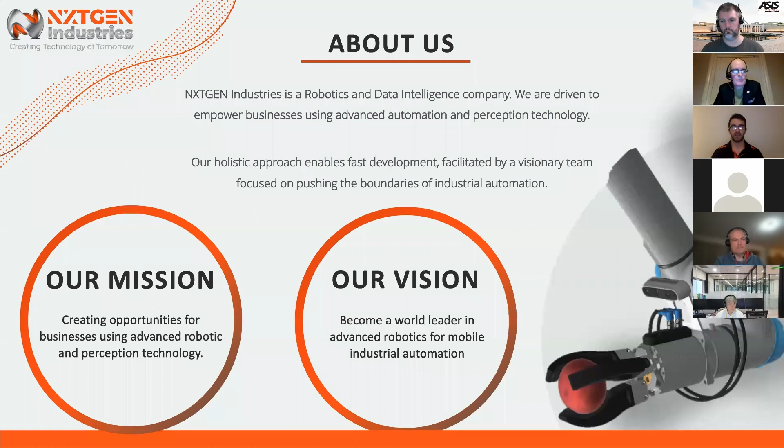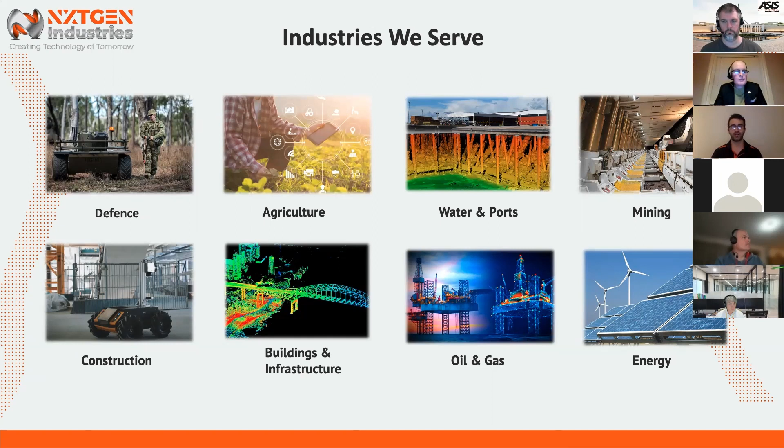As I mentioned earlier, we do work across many different industries. We like to consider ourselves as industry agnostic, and the reason why is in all of the industries we serve, we always find that the requirements industry is looking at for robotic tech is often very similar. They're looking for that mobile autonomy, the ability to provide eyes and ears without having to need people there, and delivering insights. So we do serve a lot of these industries, and I know I don't have the security industry up on this slide, but I also feel there are going to be some commonalities and problems we'll discuss later that are shared amongst some of these industries we've served in the past.

So when diving into the skill sets that we have in our business and what's required behind robotic development, we cater around mechanical, electrical, control systems, and software engineering. Now, all of these skills are required to deliver the variety of services.

Shane mentioned a couple earlier. We do offer industrial robotic design and build services, robotics as a service, and I'll talk about this a little bit later on. It's becoming really valuable where some businesses can't justify purchasing robots up front, so they implement them as a service. It becomes an operational expense rather than capital expense. So where we have robots available to perform tasks, we offer these services as well.

We also implement perception and vision systems, and this is where we use some of the technology that we integrate within robotics. But it's more aimed at providing insights and analytics, specifically around counting, classifying, object tracking, and things like this.

And then last but not least is consulting. This is where we work with businesses to identify the opportunities, maybe some of the challenges, and work out how we can adopt this type of technology within their business's day-to-day line of work.

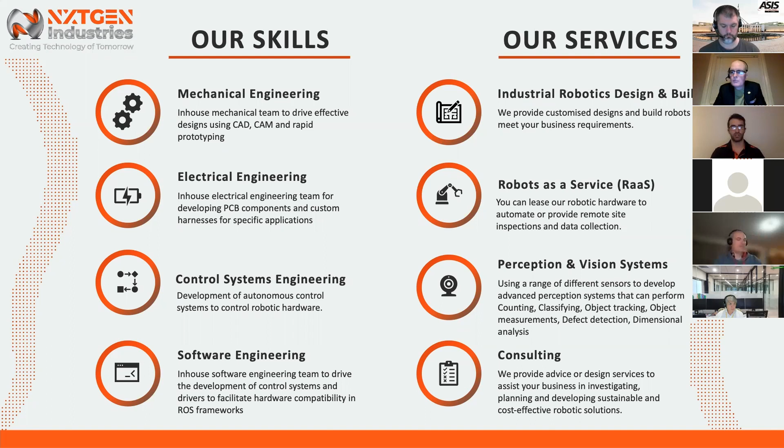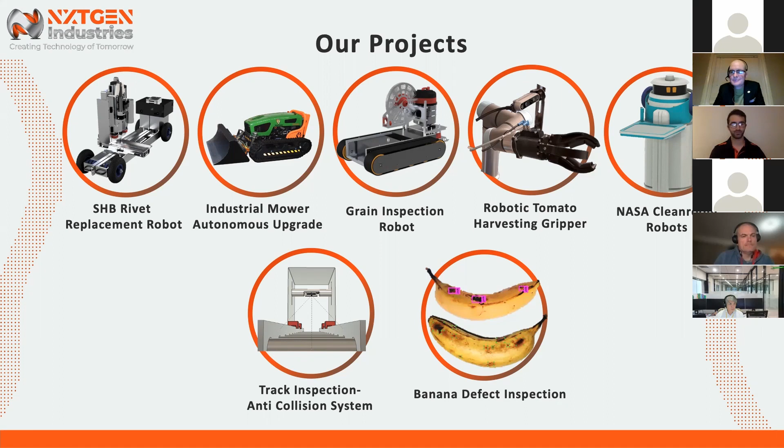Going into the first project, our Sydney Harbour Bridge robot. This was a necessary system to implement, as it eliminated the need for humans to perform their work within confined spaces.

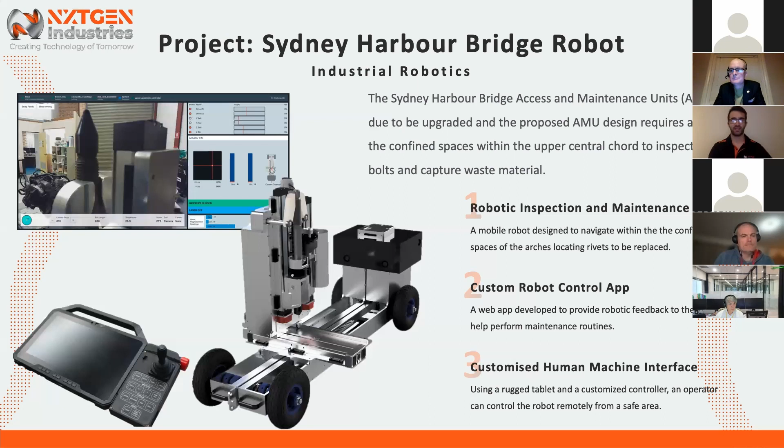What we delivered as part of this project was a robotic inspection and maintenance system, highlighted in the bottom right image. We developed a custom robotic control app, shown in the top image, and also developed and customized a human-machine interface, like a joystick controller, which attaches to a tablet. Altogether, that formulated a solution to replace the rivets in the Sydney Harbour Bridge. This is a video showing the robot in operation.

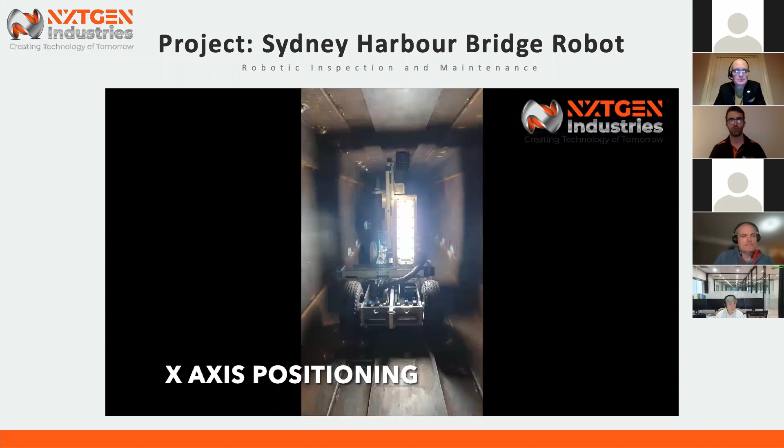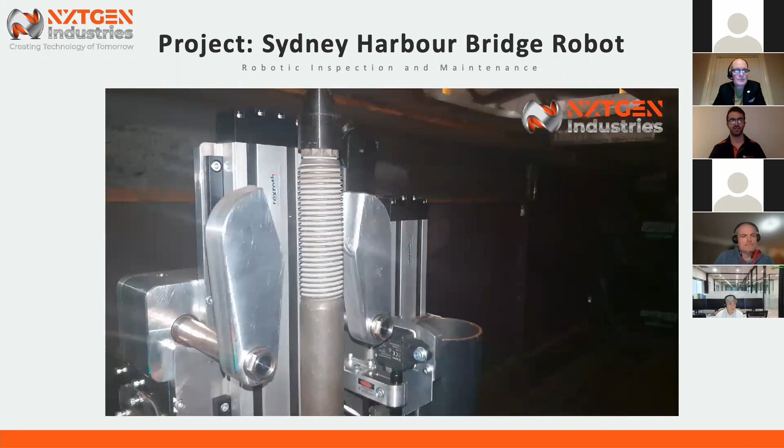What you're seeing along the top is the upper assembly, where all the advanced sensors are, such as the gripper, which clasps the new bolt that will be inserted. It also has a catchment, which you'll see in a few seconds. We've got a pan and tilt camera to provide visual feedback and positioning.

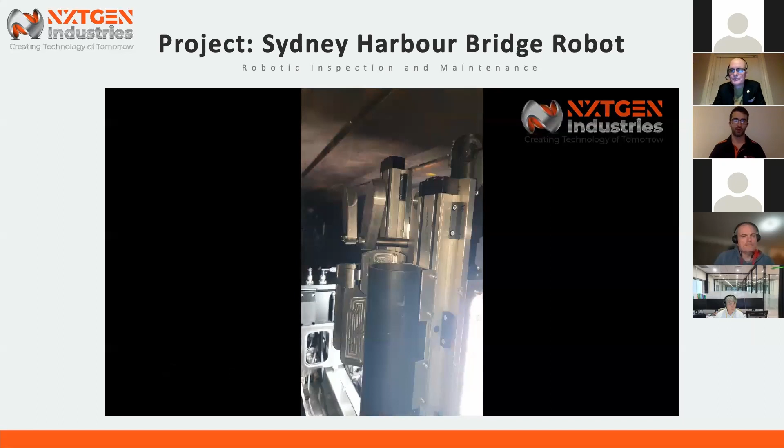We also have laser positioning, which helps the operator align the tools to the specific rivet they want to remove. We've also got the capability to drive forward and back along the confined space inside the bridge, fully illuminated with LEDs. This is what you're seeing with the tool change process, with that laser positioning, and then how we can insert a bolt where there's no bolt in that video.

Moving on into some of our solutions. I think you'll find this quite interesting, because this is where we start showing some of the autonomy in these robots. Our first solution is specifically tailored towards the robotics aspect of our business.

This is our industrial robotic mobile robot, and we're really proud of this robot because it is extremely modular by design. It comes with a control app, and it is fully autonomous.

We've designed it this way because we believe this robot can be tailored rapidly for various industries and applications. Being highly modular, you can modify it, implementing different sensors and different payloads, and also control it through the control app using different methodologies for mission planning.

With mission planning, there are three key types commonly used in various industrial robots. The first method is waypoint upload, where the user specifies coordinates for the robot to navigate to and then perform a task.

The second option is what we call teaching. You remote control the robot and teach it to perform a particular routine or navigate along a specific path. This is often one of the most desired methodologies for path planning, because you know exactly what you're going to get right from the beginning.

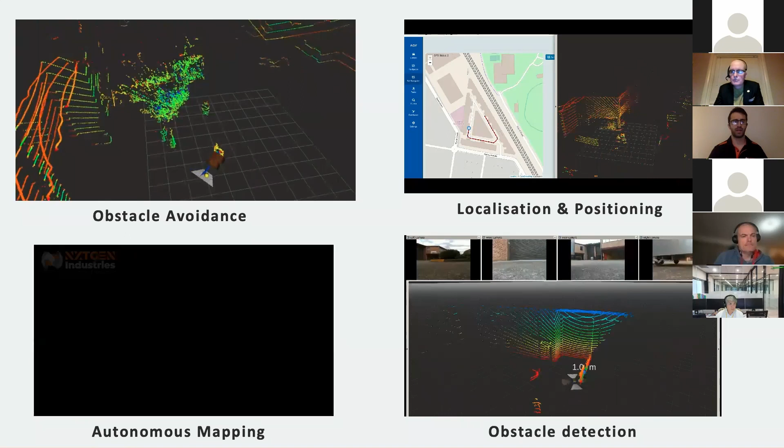Moving across to the right video, we're demonstrating the robot's ability to publish its location and position in an outdoor environment, and also publish its environment using the LiDAR sensor on the right side of that top video. What's really interesting about where robotics have moved to is we're able to use really high accuracy outdoor positioning using what we call RTK systems, giving us accuracies of up to about 3 centimeters outdoors. I'll talk about the bottom left video, which I'll replay.

This is what we talk about with autonomous mapping. Autonomous mapping is highly valuable in indoor environments. It's important to teach the robot its environment before progressing on to mission planning, because it needs to know its environment and also provide the user a way to key in inputs on certain areas where you want the robot to navigate to.

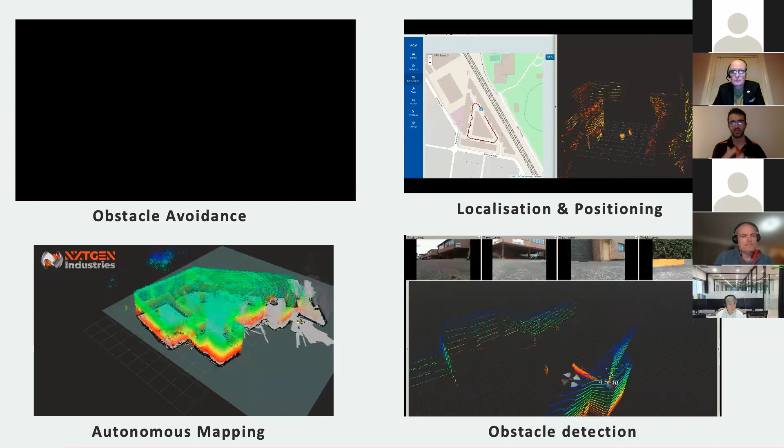As we move into the bottom right video, we're looking at how obstacles are detected, classified, and segmented. It's perceiving obstacles, clustering those objects and saying these are actually obstacles, and we want to work our way around that.

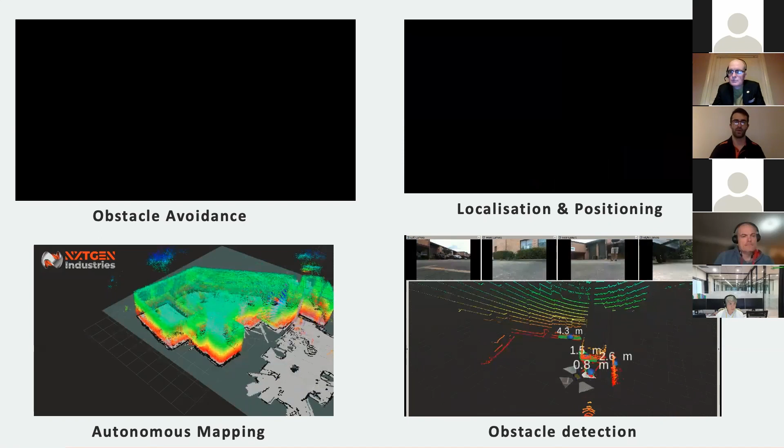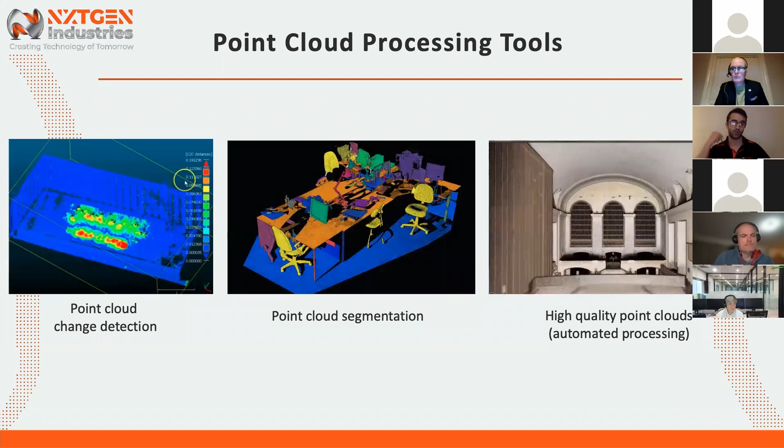The third video demonstrates the highest resolution we can achieve with point cloud data, where we can augment imagery, combining visual imagery from a camera and LiDAR data, overlaying those data sets together to get the output you see in that right video.

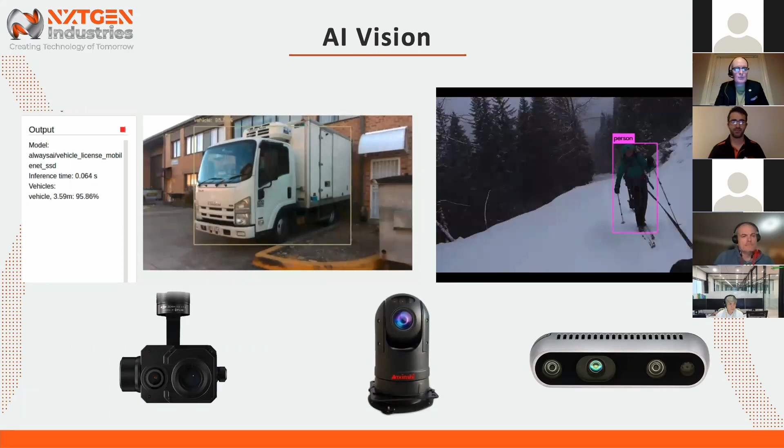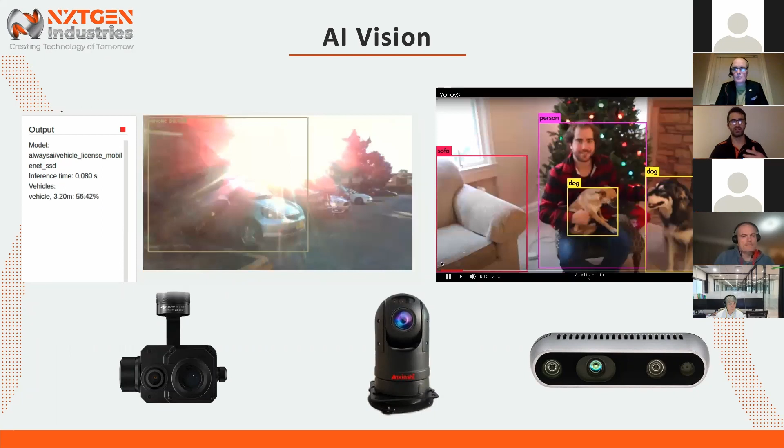As mentioned, what we brand as AI vision, also video analytics, these are some of the capabilities quite common in robotic applications. On the left-hand side, we're demonstrating the ability to detect vehicles and number plates in real time, but also using sensors to provide feedback on the distance of that vehicle to the camera, and this can be done in real time.

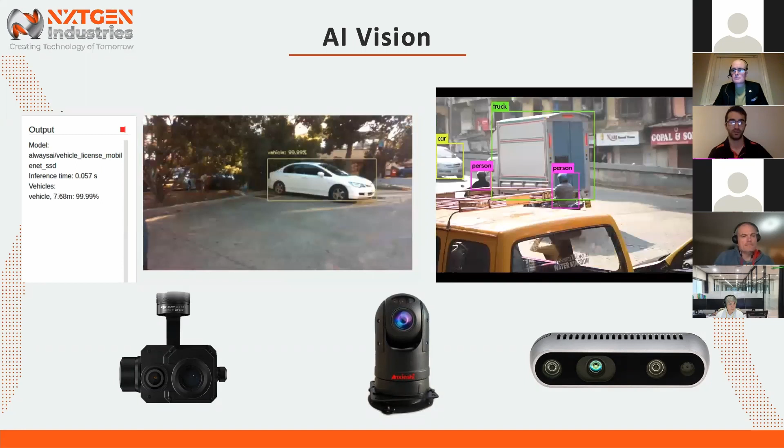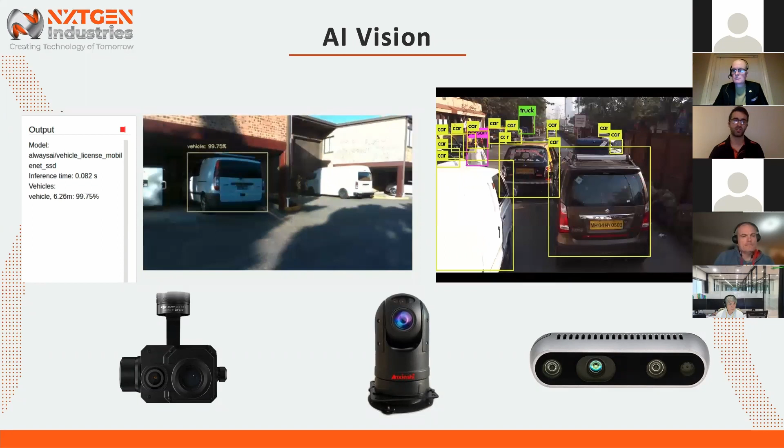There's a wide range of platforms and pre-trained data sets that we can make use of, as you're seeing on the right video. We're able to pick up on various types of objects like vehicles, cars, horses, birds, using existing pre-trained data models.

Something I should point out here as well is you're not really restricted by the hardware in this space, because you can always do this type of operation as a post-operation rather than in real time. So it can be done offline.

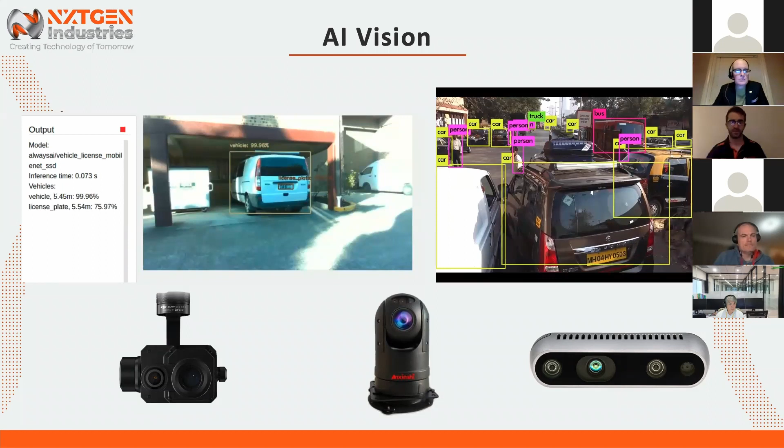Alright, let's dive into the security side of things. Now that I've shared a bit about and demonstrated the capabilities of robots and inspection systems, I'm going to dive into the security space and provide some of these insights.

You know that there are solutions out there, and I've looked into them and got some feedback. Nonetheless, some have got impressive features, but I'd like to see a little bit more out of them.

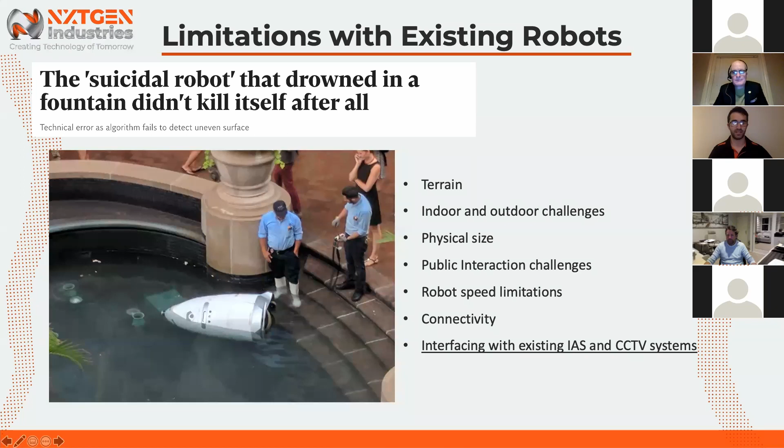So let's have a look at some of the potential applications where robots can provide value. A few of you may be familiar with the deter, detect, delay, and respond security layered methodology. I'm going to use our Knightscope robot again as a feature of this, because I think there's a lot of value that robots can deliver in these four key areas.

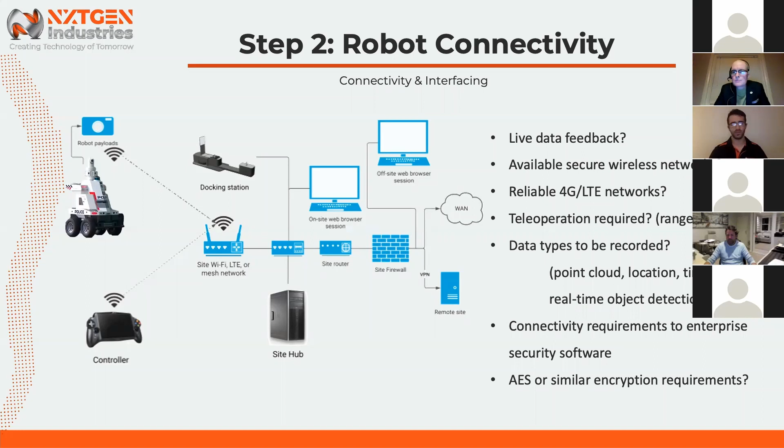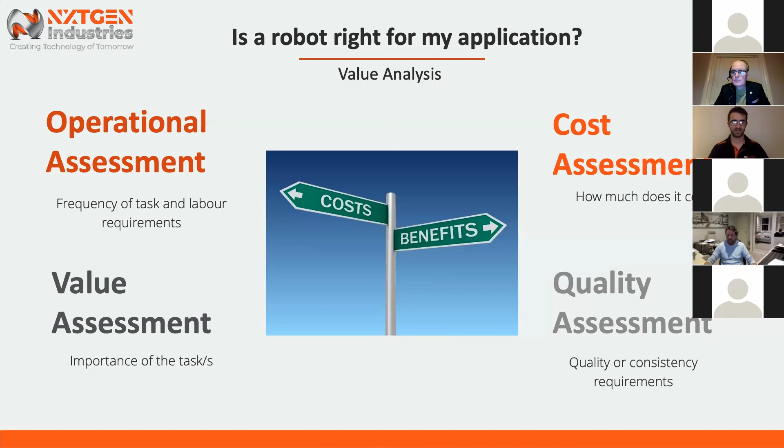So when we look at the outlook for security robots, my answer is pretty simple: it depends on 2 key factors. The first thing relies on industry uptake, and the second is obviously the technology to support the development of the solutions. I'm particularly interested because I think as the industry takes up the technology and robotics as a whole, we'll start to see a lot more specific applications coming out.

So we mentioned before around the 4 key areas: deter, detect, delay, and response. I think robots are going to be able to actually deliver specific value, and specifically around providing more in the delay area that I didn't mention.

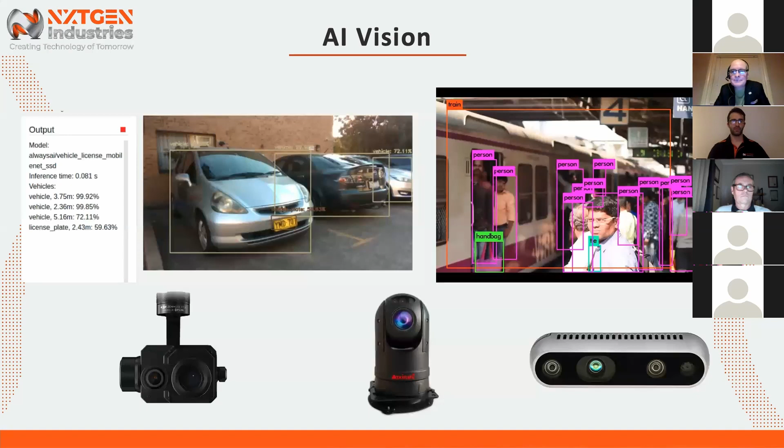If you want it to do a pre-trained route, absolutely, and that's particularly what they do in industry. Rather than the robot making up its own mind, at an industry level that middle option is often enough, because you want to make sure that you're going to get that right coverage. So on day zero, when we're doing that commissioning process, it's often someone remote controlling and seeing what type of visibility they get out of the drone as they move around. Once they're happy with the mission and the route, they save that, and then we say we just want to repeat this on an hourly, two hourly, maybe daily basis. So absolutely, you can set those parameters.

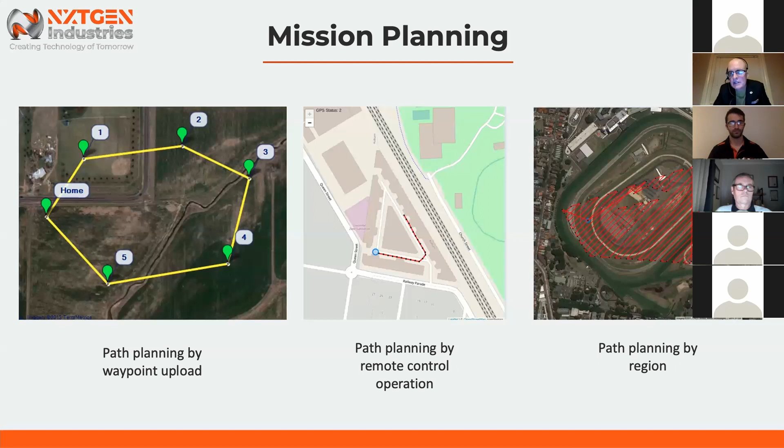Great. His second question was just an observation around how much of the example tasks look like functions that can be done by CCTV. What is the special functionality that robots bring to a fixed installation? I guess that's something we already touched on.

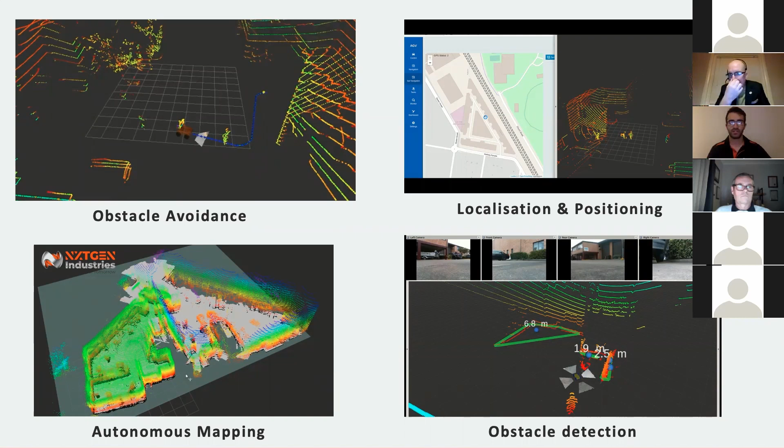Yeah, look, to be honest, to put it simply, the way the current robots are branded is they're mobile CCTV footage, CCTV platforms. Realistically, I'm just going to bring this slide up - this is often where we provide a lot of our insights, where you've got large properties, large areas, and it's just not justifiable to put lots of sensors out there.

A particular application, completely tangent and irrelevant to the security industry, is on farms. A lot of farms are looking at IoT technology where they put lots of sensors, but when you talk about managing the assets, managing the sensors, managing the data, and also the cost to maintain those assets, it gets to a point where having all of those assets, there's a trade-off with having just one mobile solution to go off on autonomous missions and collect that data on a repetitive basis.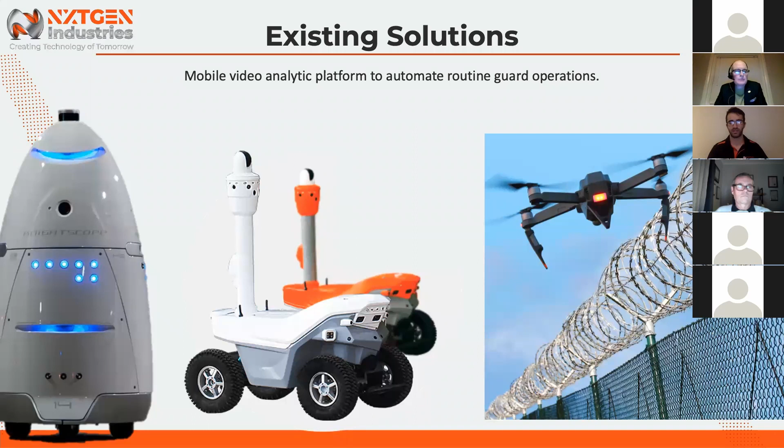So absolutely, first point of call, we do the assessment - are stationary or portable CCTV platforms on those trailers a viable implementation? If yes, go for that. If we're looking at larger areas, maybe drones are the solution. That's where we've really got to look at that value analysis I pointed out towards the end of the presentation.

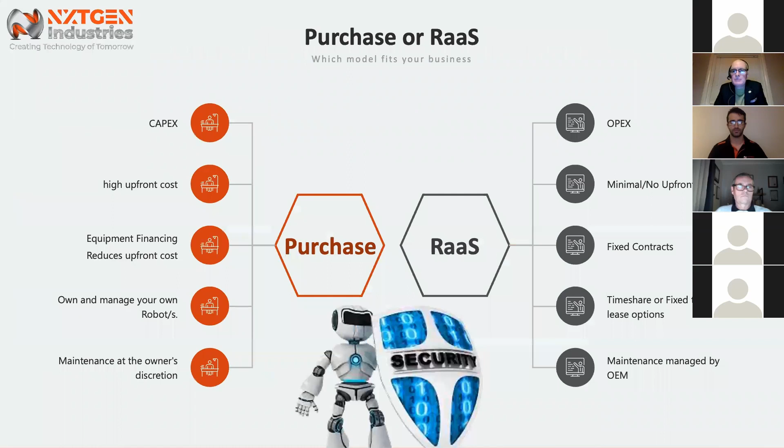Taki came back again and made another observation around gathering and analysing information being one part of security, but he's also interested in the development of the response part to the D3R model. In many incidents, security personnel can be easily outnumbered by the adversary, who can come in big numbers. Any development on how robots could help our limited security personnel hold their ground until help arrives, or maybe even back them up against multiple adversaries? I guess this is where drone swarm technology could come into the picture.

I like that, Shane, that's nice. Yeah, you're looking for a robot job? I'm learning. I'm learning quick.

No, exactly right. Look, I think it all comes down to that value analysis, right? So when we talk about backups - is it a viable solution to have a bunch of robots sitting in a storage shed ready to come out on D-Day? Maybe not. But the capabilities are there, right?

So if an intrusion alert happens and your security system says there's been a breach at this location, and it provides a picture of a person or a bunch of people, you deploy a bunch of drones to that location and you're tracking them, providing that type of thing. So yes, you can, but it's that value analysis. I guess the real answer is how much money has the client got to spend? If you want to pay for an army of robots to stand by in the shed in case something happens, then go for it.

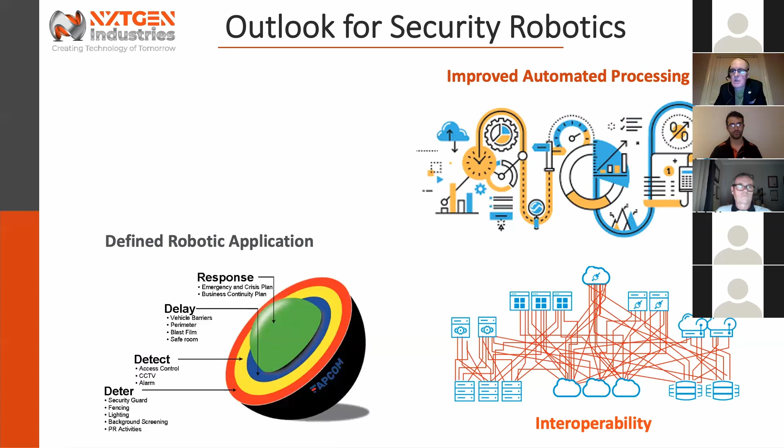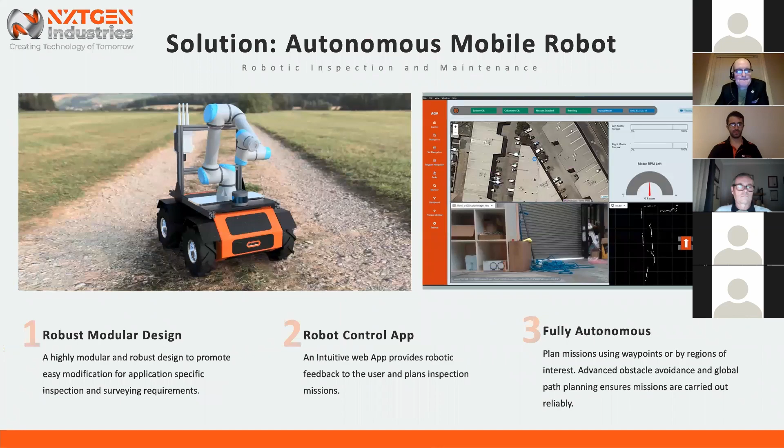Yep. So if I just quickly make reference to one of the earlier slides, I'm going to go down to the pyramid. Okay, our technology is basically applied realistically in the blue, orange, and grey area, right? So what's really important to know is at the application level, we look at mobility, right? Autonomous mobility. We look at data inspection and collection, and sometimes we look at providing some type of autonomous process, or autonomous task, right? So it's less inspection, more so it could be pick and place or something like that.

At the hardware level, it's very much into either developing custom hardware if it doesn't exist, and that's the specific side of things, so specific development. But our current tech is more so around that orange layer and that grey layer, where we interface our control logic, our control systems, and the backbone of most robotic systems. What that means is effectively we can go off and develop those specific applications a lot quicker. So it comes into kind of like the hidden gems that's not quite on the surface. But the AGV that we showed in the presentation, that's a purely inspection vehicle. So we strap on different cameras, different LiDAR sensors, and we can do some of that analysis, like change detection with LiDAR sensors.

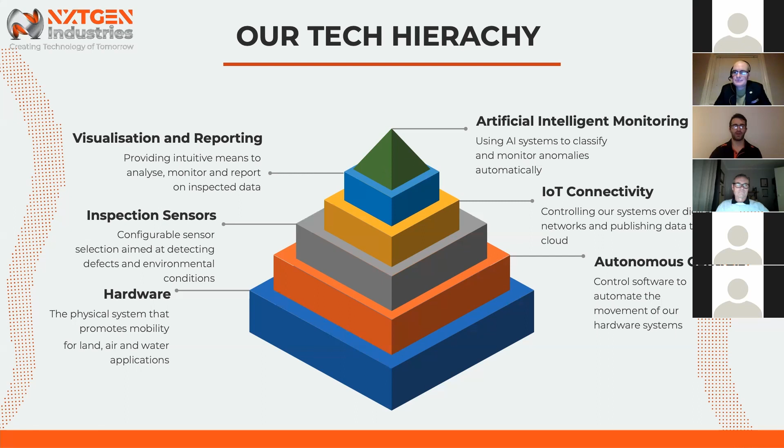Okay, I'm going to touch on this - I'll bring the slide up for you, I think it will provide some nice context. I like wheels or tracks.

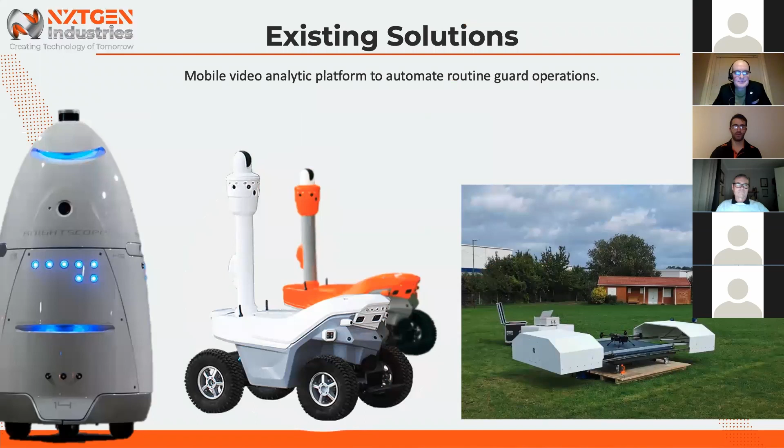Personally, I like wheels or tracks, mainly because when we look at industrial applications, often enough you don't want to deploy and purchase a robot that's 50 grand, 60 grand, and for it to only last half an hour. You want to be able to get longevity and long life, to perform operations consecutively. So when we consider a daily shift that could be 12 hours, or 10 hours, or even 8 hours or 6, whatever the application is, those legged robots will be lucky to give you an hour.

They're highly versatile, they can go upstairs, they can do all these types of things, and that's what really sucks a lot of people in. What's really interesting is the things you see on top of Spot the Dog, which is the legged robot - they're actually just bolt-ons, not really well integrated within the robot's perception. So it's like, I've got a perception system, and I need to actually put an additional battery on that, because you can't plug it into Spot's battery. So they're like, boxed in, like Apple.

Whereas when you look at tracked vehicles, you get bigger batteries, you get real chunky drives, you're not chewing through a lot of power. You don't need to hold itself up like a legged robot does. So yeah, I'm very much around the wheels and tracks.